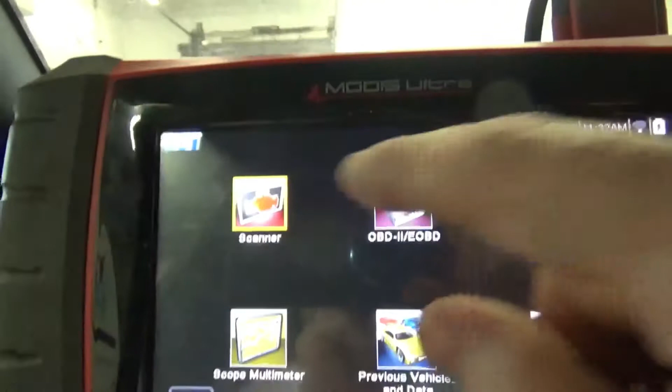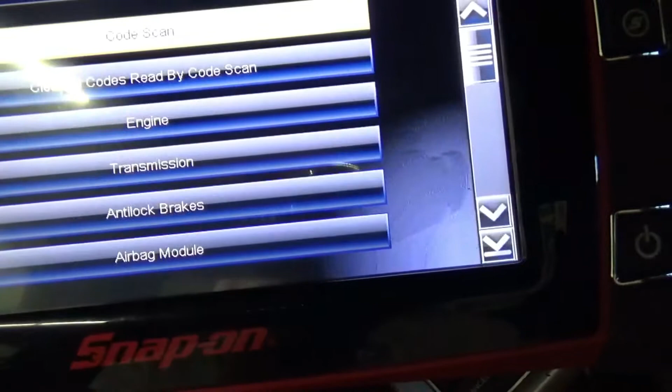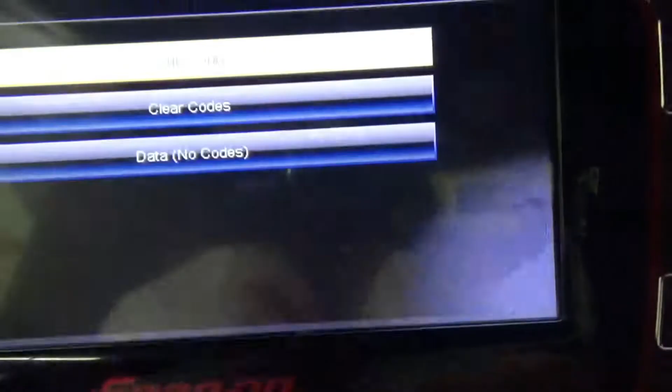So with that being said, we're going to hook up my scan tool and see what's going on with it. We are going to go to scan. We are going to go to Dodge. We're going to go to a 2012. Automatic ID. And OK. Now we're going to come down to airbag module. Tell us when you turn on the key. Now we're into the airbag module.

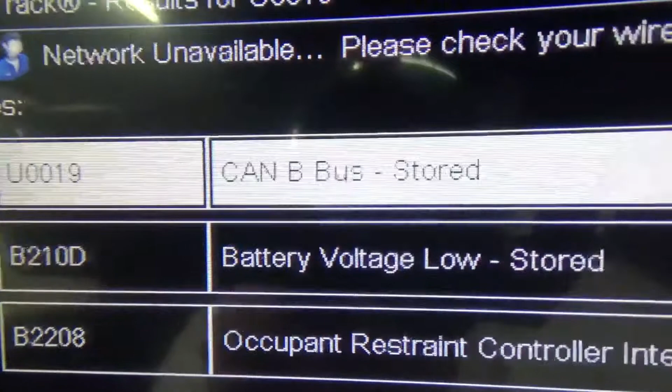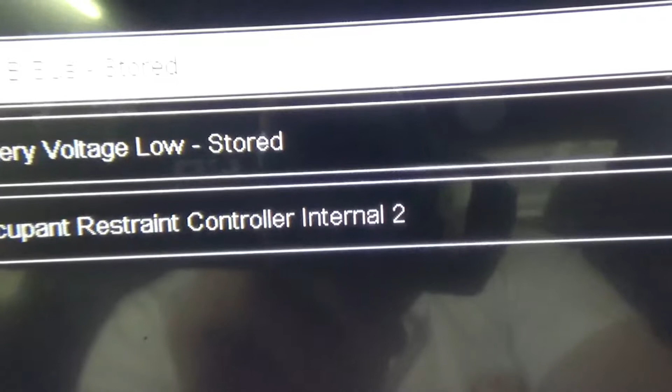Now I only want to see what my codes are. And as you can see, I have a U0019 CAN B bus stored, B210D battery voltage low stored, and B2208 occupant restraint controller internal 2. So the two up here I'm not too worried about. It's this one right here that I am actually worried about.

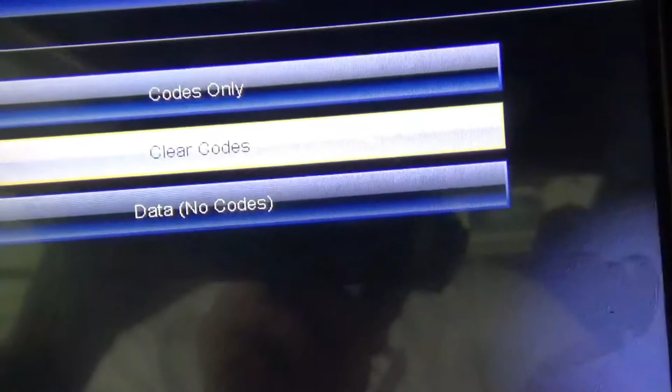And the reason I am worried about that one is because if you actually come to try and clear the codes, the car is not running. I'll show you guys that too. My RPMs are at 0 and the car is not running. Now when I go to clear my codes, this is what happens. Are you sure? Yes.

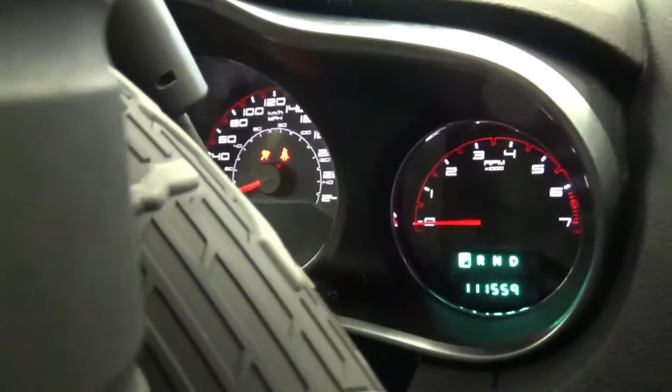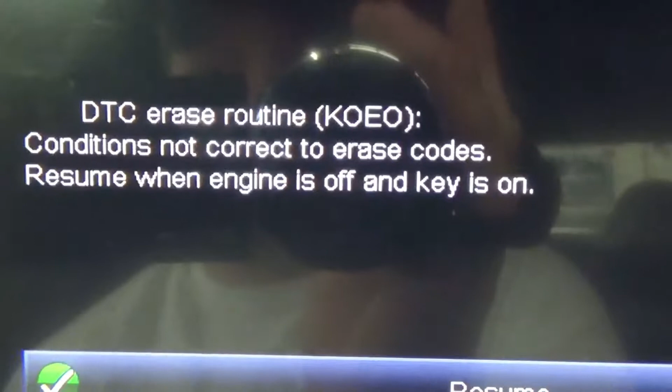Now, in order to erase the airbag codes, your engine has to be off. My engine is off; it is not running, as I showed you right here. And the airbag module is telling me that my engine is running. So what this is telling me is that there's probably an internal short in the airbag module that is keeping it alive, from what I could tell.

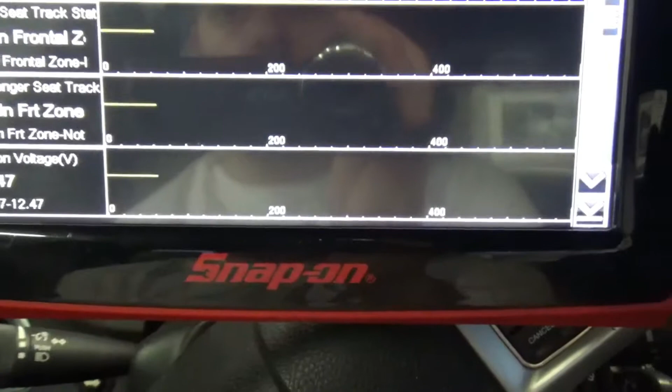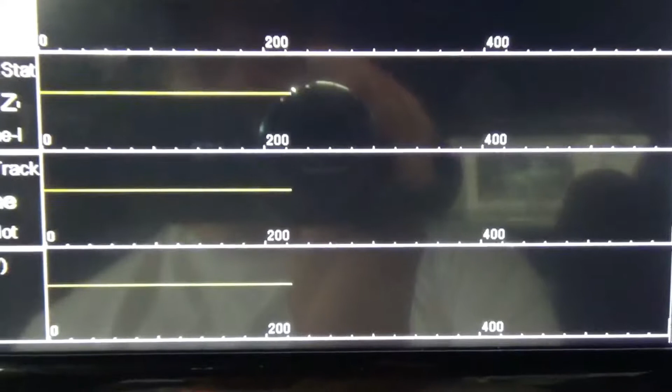Now we're gonna exit this, and we're going to go into data. Now I'm not worried about a power or ground or anything for this module, and the only reason I say that is because I am actually able to communicate with it and I can actually get into the data. Now if I wasn't able to get into the data, but I was able to communicate with the module, then I would go more towards grounds and powers. But for this, I'm not too worried about that at all. I'm actually worried about the module itself.

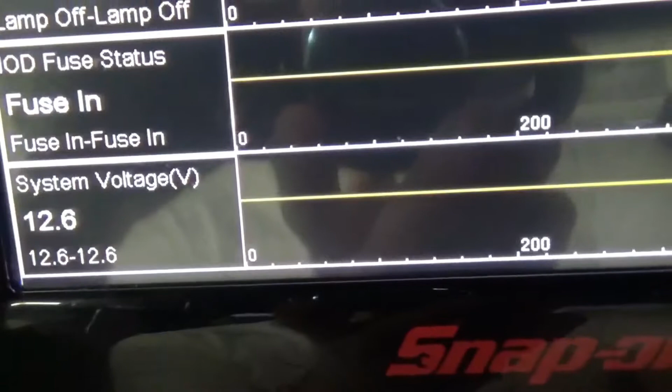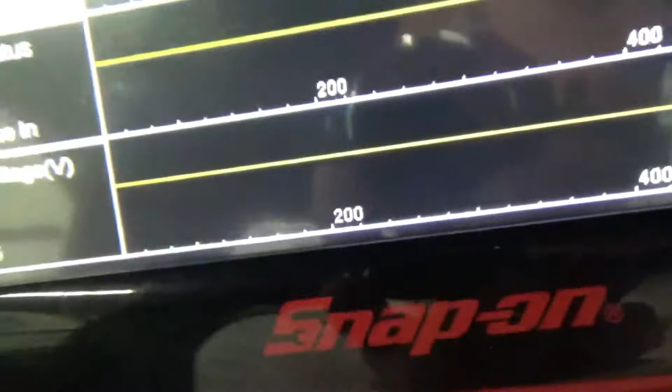So with that being said, we're gonna check right here. As you can see, I got 12 volts going in from my battery. Ignition voltage, my system voltage is at battery voltage. And if you see here, passenger airbag disabled. The lamp is off. If I actually try and activate that by sitting somebody into it, it does not change. So that's telling me that the module is not reading what's happening with the occupant detection system either.

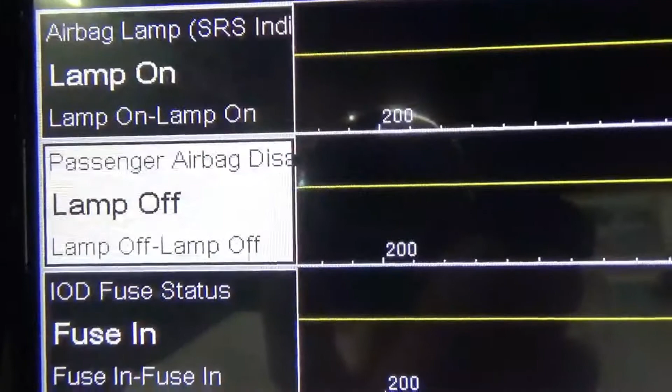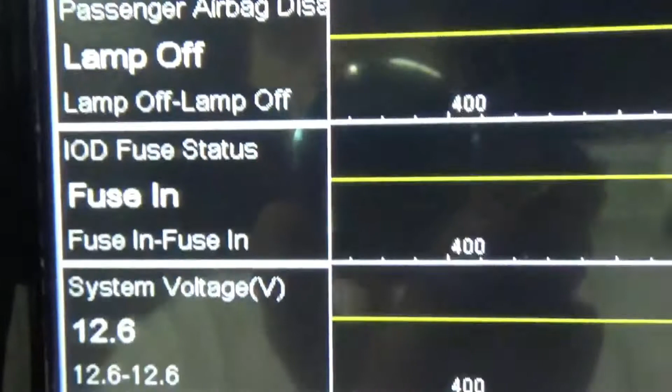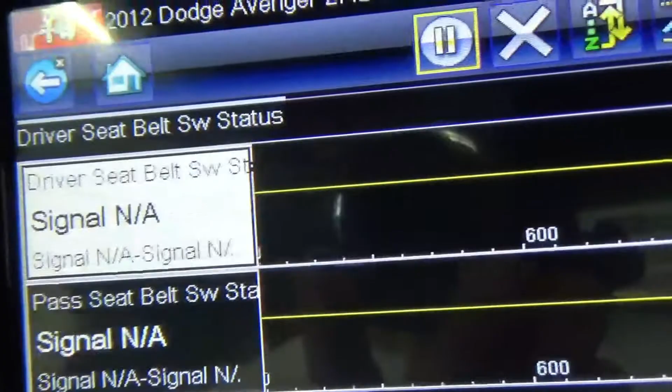Now, if I come down here, where is it? Oh, I passed it. Looking for seatbelt. There. If we come to the driver seatbelt switch status, now I'm going to take my seatbelt and it's off, and it should be off because it's not available. Now when I take this and I plug it into here, that should change. And as you can tell, there's absolutely no change. So that's telling me that the module isn't able to take in data at all.

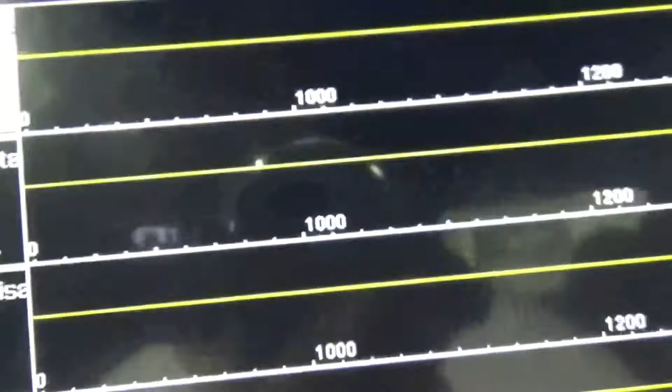Now there are some checks that I can do, but I'm actually going to have my client order up a module just to have on hand. I'm not going to install the module right away because I have to remove a bunch of components for the dash in order to actually change the module. So before doing that, I'm going to show you guys on my phone. Sorry about that, but I don't have my laptop with me. So if I come down onto my phone, I'll show you guys right now.

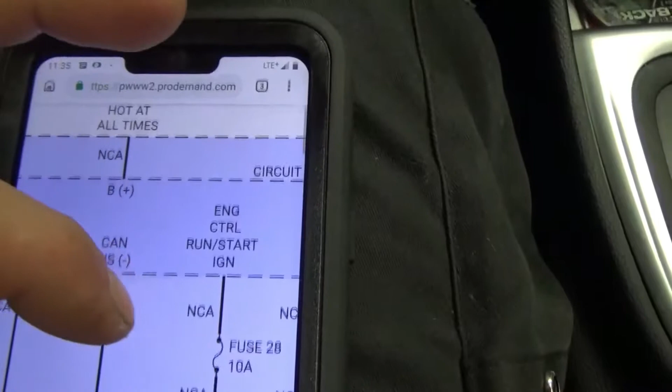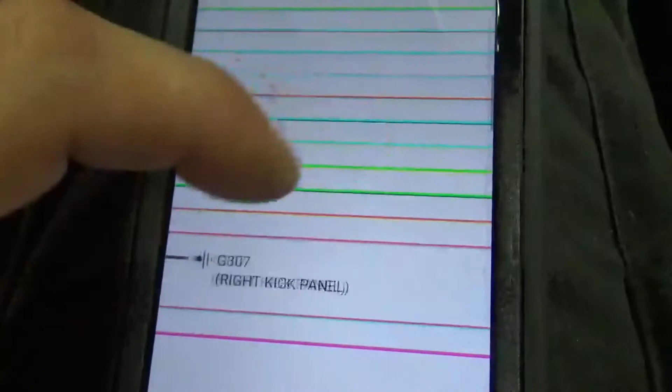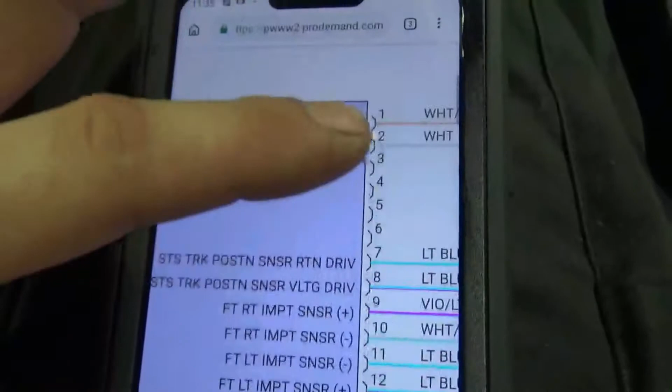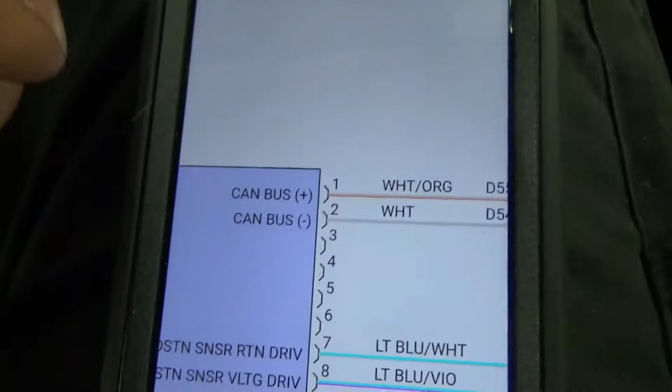Okay, you got engine control, run start, and ignition. Just gonna follow the wires, and those are gonna be my two 12-volt wires. Now these wires, like I said, I'm not too worried about my powers and grounds because I'm actually able to communicate with the module. See, this one's on the right kick panel, and my powers run from my TIPM all the way down to my airbag module. And I'm not too worried about the communication going in as much either, because if you see here's my CAN bus positive, my CAN bus negative, I'm actually able to bring up my data. So that tells me that my CAN signals are actually reaching it and are working properly.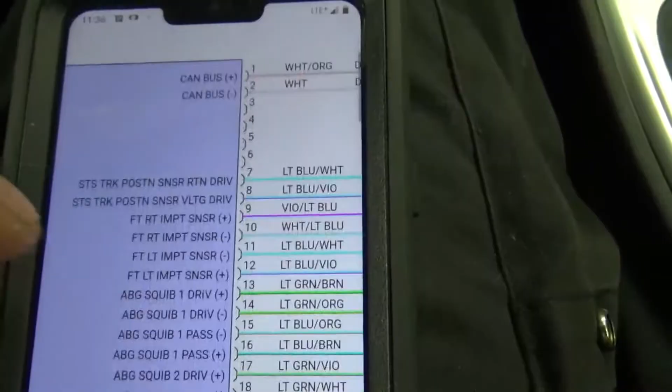Now what's happening is what's coming out. And in order to test that, I want to actually just have the module on hand, because 99% of the time, when you have an internal error code, it's actually going to end up being the module, because these airbag modules are well monitored. So if you got an internal error code, 99% of the time, you are going to have a bad module.

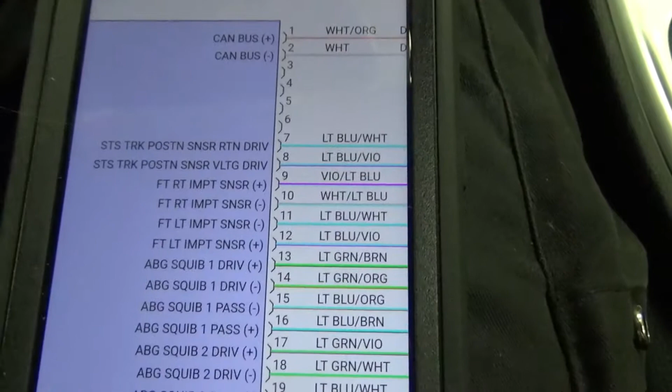Now, if you're not able to communicate with a module, then I would go more towards power and grounds first, and then if all your power and grounds are there and there's still no communication available with the module, check your CAN bus systems, your CAN bus lines. Then if you have communication on your CAN bus lines, then condemn the module.

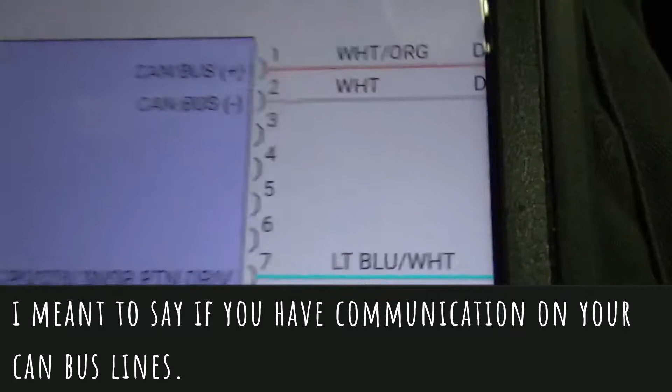But since I'm actually able to communicate, I'm more worried about the inputs than the outputs. And not from the CAN bus system, because I'm actually able to read, but what I mean by input is like from my seatbelt. I should have an input when I plug my seatbelt into the latch, and I don't have anything. So that's telling me that I have an input issue with the module. It's not able to receive an input from a component. So with that being said,

Oh, actually, before I leave, I just want to show you guys that the airbag light is actually on. I'm going to start the car. You're going to see it's going to go out. Well, it should go out. We'll see. No, it won't go out. I'm into the module. That's true. So, let's redo that. So as you can see, the airbag light goes out and then it comes back on. Now it goes out because it's running its check, and it comes back on because the checks did not pass. So just keep that in mind.

So now with that being said, I'm going to leave you guys be, and if the customer wants to go ahead with the repair, I'll be getting back to you guys and show you how the repair goes.